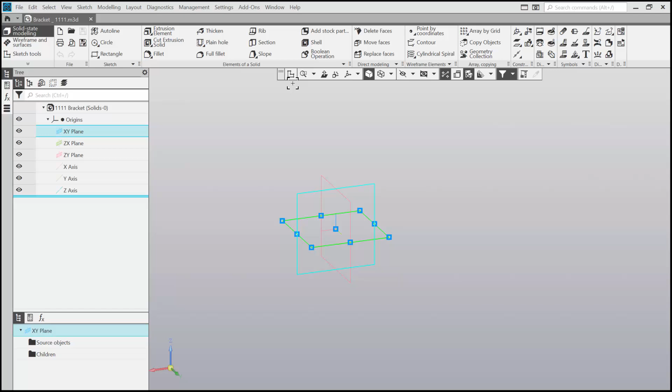Select the XY plane again. Now try to do this in the graphic area. It's the blue plane. When you click on the plane, the context panel appears. Click Create Sketch in the panel. You can also select the same command from the Quick Access bar. The XY plane rotates to be parallel to the screen, or in other words, perpendicular to our view.

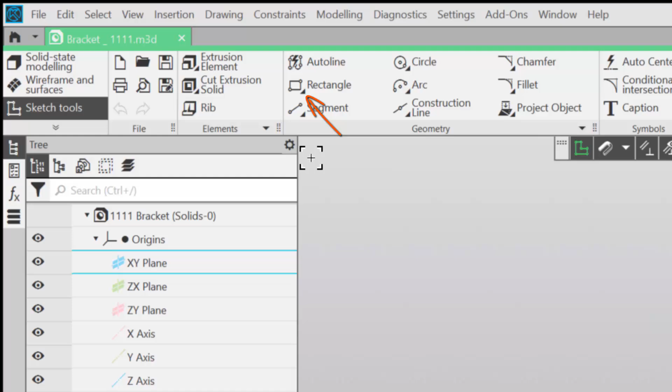Let's start a sketch. Take a look at the Geometry toolbar and find the Rectangle command. If you hover over any command in KOMPAS and wait a few seconds, a brief description of the command will appear. You can see a black triangle in the bottom right corner of the Rectangle button. It means that a group of commands is hidden here.

Hold down the left mouse button to open the drop-down list and move the cursor to select Rectangle by center point and vertex. You can also click on the Rectangle button and then select the command you need from the Parameter panel. Note that at the bottom of the Parameter panel you can see a tip informing what to do next. Hover the mouse over the origin.

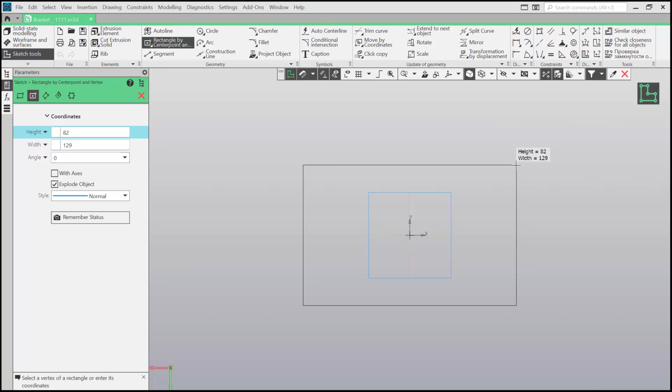This symbol indicates that the nearest point snap is active. Click to place the rectangle center point precisely in the origin, so the part's plane of symmetry will align with the origin as planned, and then click somewhere to create the rectangle's vertex. Now you can complete the current command. You can click the red cross or press the Escape key. But now let's move on and start the next command. The Rectangle command will be completed automatically.

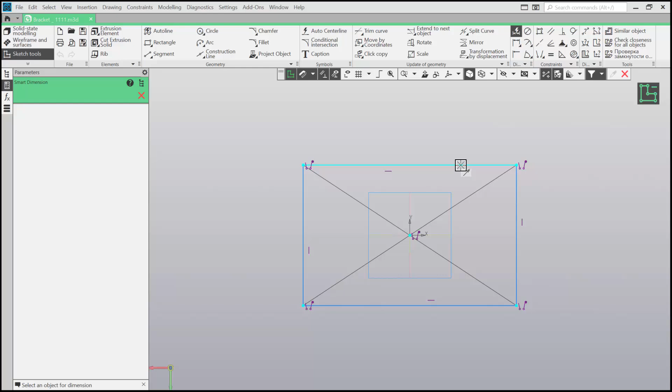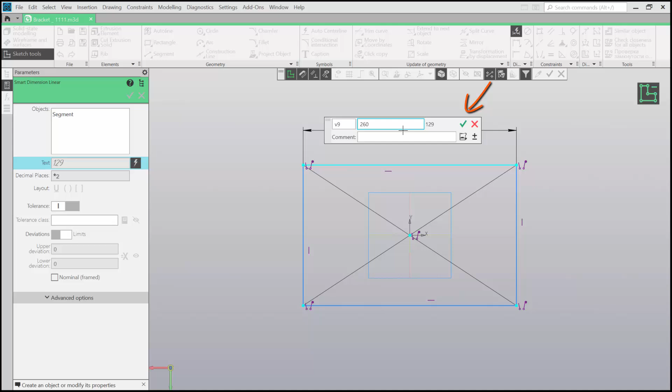Click Smart Dimension on the Dimensions toolbar. This command automatically determines the type of object you've selected and creates an appropriate dimension. Hover the mouse over the segment you need. When it turns turquoise, click to select it. A preview of the linear dimension has appeared. Now click anywhere to position the dimension. Let me enter the length of our rectangle in the panel that appears. 260. You can click the green check mark to confirm, but let me just press Enter.

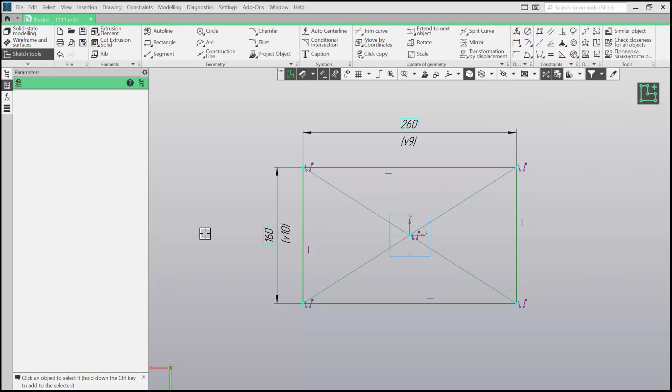It works the same. The Smart Dimension command is still active now, so let's dimension the other side of the rectangle the same way. This time select two vertices one by one. The command defines that you need a linear dimension again. Position the new dimension. Press Enter. Press the Escape key to stop the Smart Dimension command. We don't need it anymore. If you've made a mistake, double-click the dimension value to correct it.

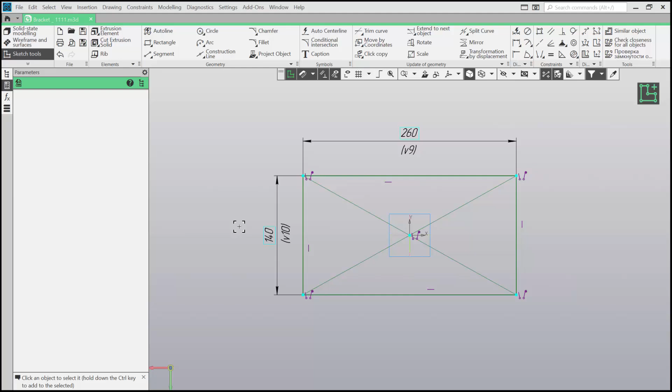By the way, you can delete any object in KOMPAS using the Delete key, and you can undo the last action using the standard command in the Edit menu or by pressing Ctrl-Z. Our sketch is ready now. Let me add some volume to the plane sketch. Click Extrusion element on the Elements toolbar. You will exit the sketch mode. A preview of the new elements appears. In KOMPAS, this preview is called a phantom.

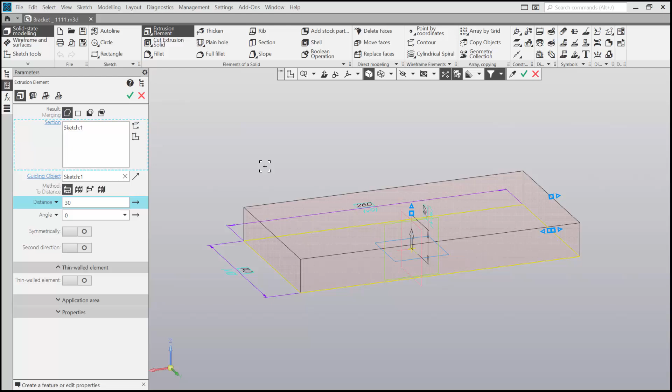Take a look at the Parameters toolbar. The distance field is highlighted. It means you don't need to place the cursor there manually. You can enter the value right away. Enter 30. Press Enter. Notice how the phantom has changed. You can confirm the command by either using the green checkmark or pressing the mouse wheel. I prefer the second option.

Note that the Extrusion element command is still active. If you click on some element, you will get a new volume that you don't need. So let's stop the command. We have created the bracket's base. If you need to evaluate the model and view it from different angles, you can move and rotate the view.

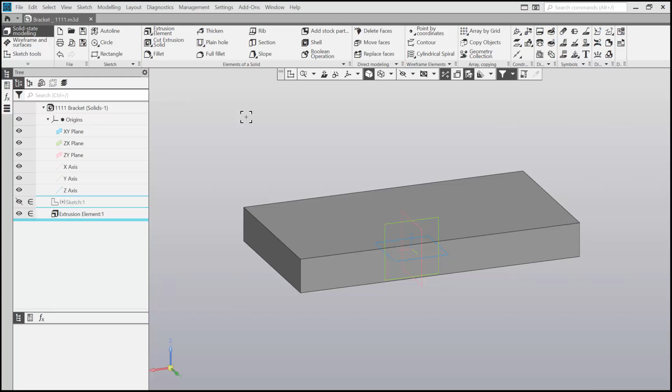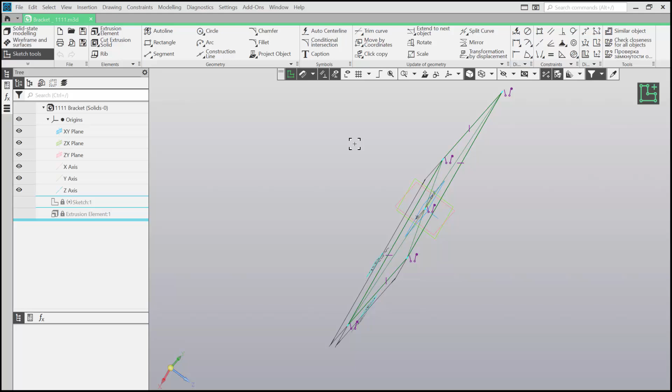Hold down the right mouse button and move the mouse to rotate the view. If you need to move the view, hold down the mouse wheel and move the mouse. A tip: if you've accidentally rotated the view while in the sketch mode, click Normal tool in the Quick Access bar to reset it. Rotate the mouse wheel to zoom out or zoom in.